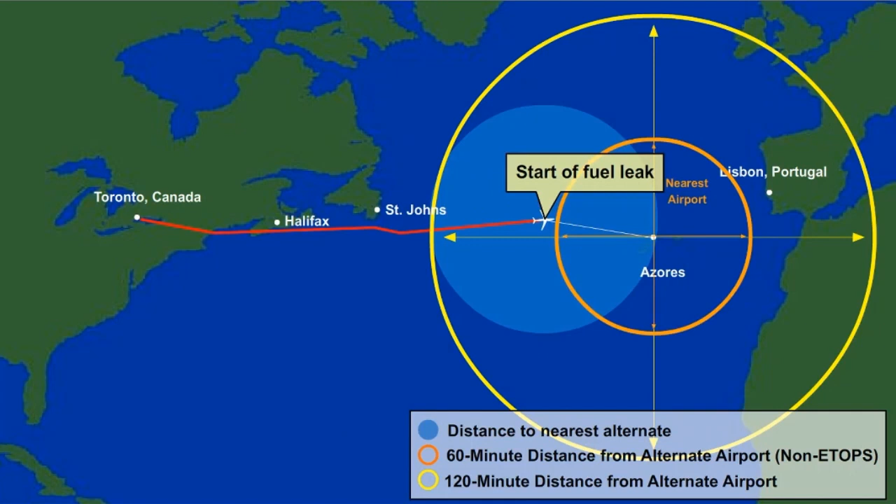This non-ETOPS portion is shown by orange circles. The first point in the flight that is more than 60 minutes from the nearest diversion airport, shown as the airplane crosses the furthest extent of the orange circle from St. John's, is called the ETOPS entry point. During the ETOPS portion of the flight, the airplane stayed within the 120-minute diversion distance shown as yellow circles. After passing another equal time point between St. John's, Newfoundland and Lajes Airport in the Azores, Lajes became the nearest alternate.

The investigators determined that the fuel leak in the right engine began at 4:38 Coordinated Universal Time, just before the airplane reached the 60-minute circle of Lajes, known as the ETOPS exit point. As the fuel leak grew larger, there came a point where the airplane no longer had enough fuel to fly to its destination of Lisbon.

Initially, there was enough fuel to fly to Lajes. However, the flight crew was distracted by unusual engine oil instrument readings. This, combined with an automatic transfer of fuel to the tank feeding the leaking engine that masked the loss of fuel out of the tank, delayed the crew's awareness of the loss of fuel. By the time the crew initiated a diversion at 5:45, the airplane had already lost too much fuel to reach Lajes Airport. The right engine flamed out 150 nautical miles from Lajes.

The left engine flamed out 65 miles from the airport. The flight crew was able to glide the airplane to a safe landing. However, the airplane was damaged during the landing rollout.

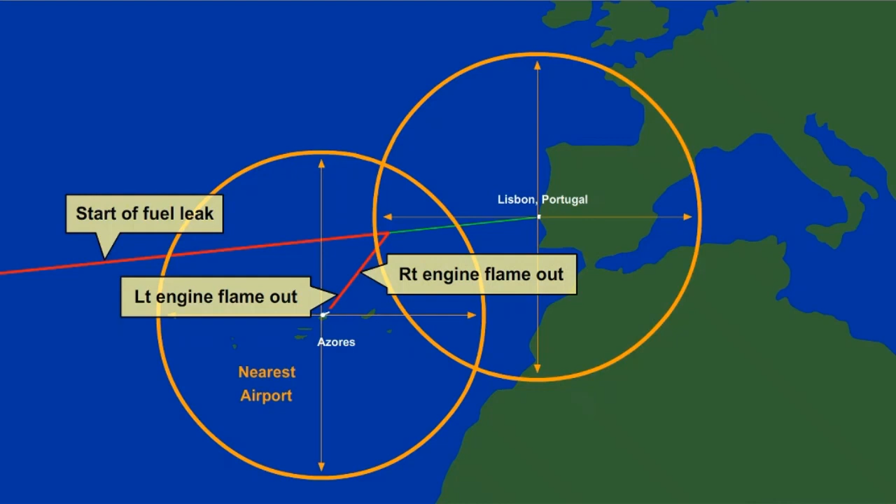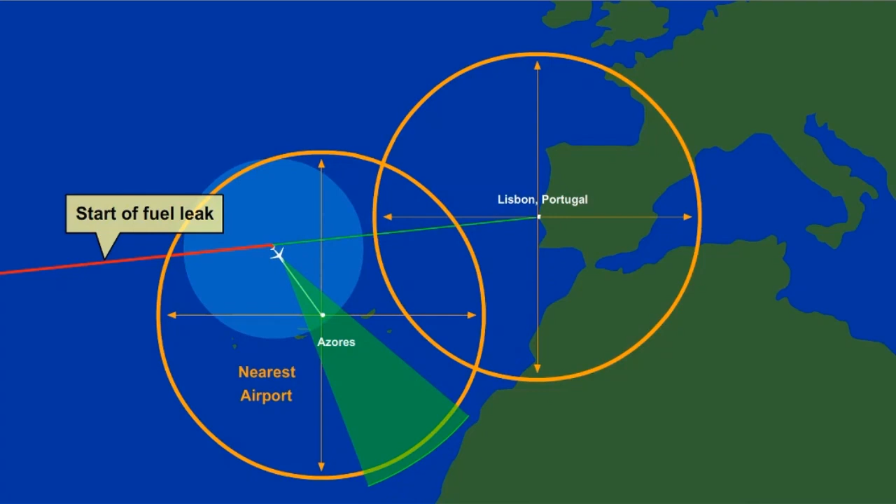Following this accident, requirements for low fuel alerting systems were added to the ETOPS regulations. Had the AirTransat A330 airplane been equipped with such a low fuel alerting system, the flight crew would have received an alert on the electronic centralized aircraft monitoring system, advising them of their low fuel condition with sufficient time to safely divert into Lajes. Checklist procedures associated with the alert message would have required the crew to shut down the right engine to stop the leak and to isolate the remaining fuel available to the operating engine.

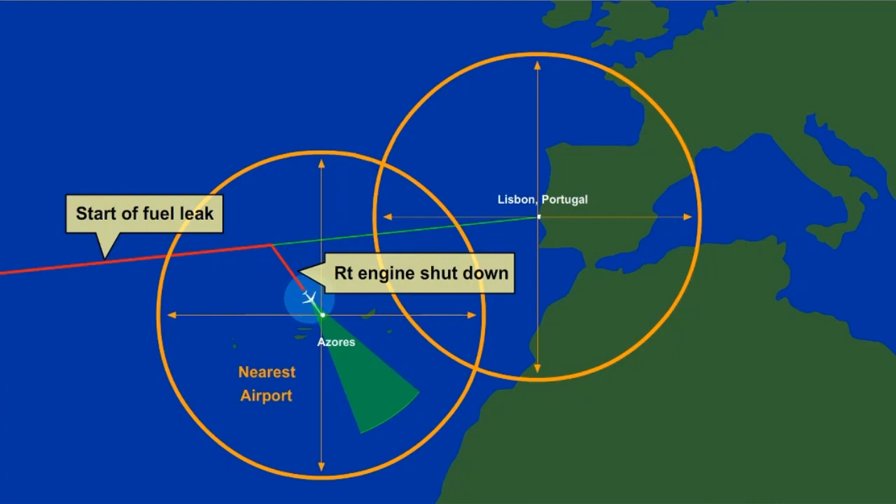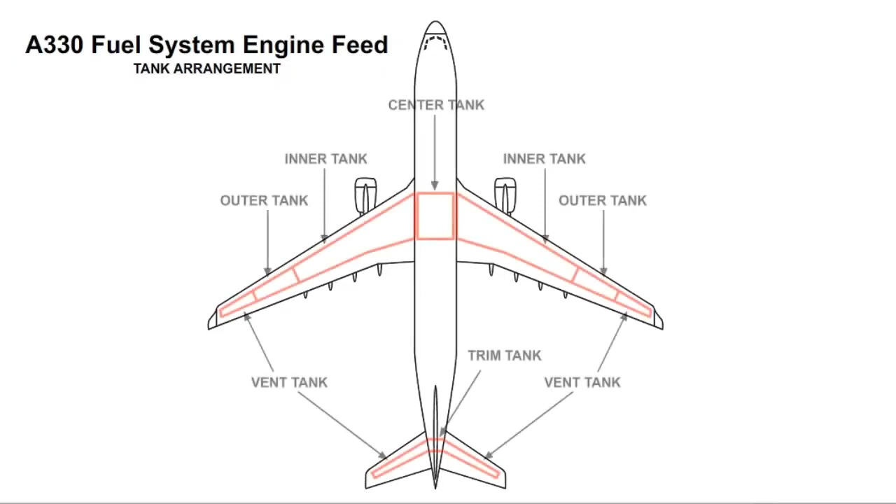This is a simplified diagram of the A330-200 fuel system. The system includes a fuel tank located in the trimmable horizontal stabilizer, controlled by a fully automatic stabilizer trim tank transfer system. The system controls the center of gravity, or CG, of the aircraft by transferring fuel to or from this trim tank to maintain a CG within 0.5% of a target value.

When fuel is transferred aft to the trim tank, the CG moves aft. Conversely, when fuel is moved forward out of the trim tank, the CG moves forward. It is through the movement of fuel back and forth in this manner that the trim tank transfer system controls the aircraft CG. The purpose of the automatic transfer system is to increase fuel efficiency by managing the airplane CG,

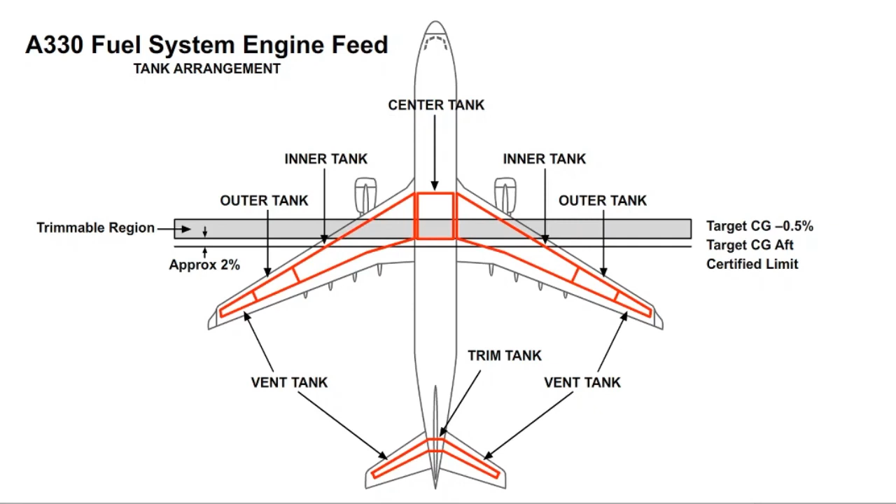Early in the flight, the system transfers fuel into the trim tank until the trim tank is full or the CG reaches the target. Normally, only one aft transfer of fuel is required per flight. As fuel is consumed from the main fuel tanks, the CG moves aft.

When the CG reaches its aft target value, which is approximately 2% forward of the aft CG limit, the system transfers fuel out of the trim tank forward to the inner main tanks until the CG is 0.5% forward of the target value. Then the cycle repeats itself with a series of fuel burn and forward fuel transfers to maintain aircraft CG within this 0.5% CG region.

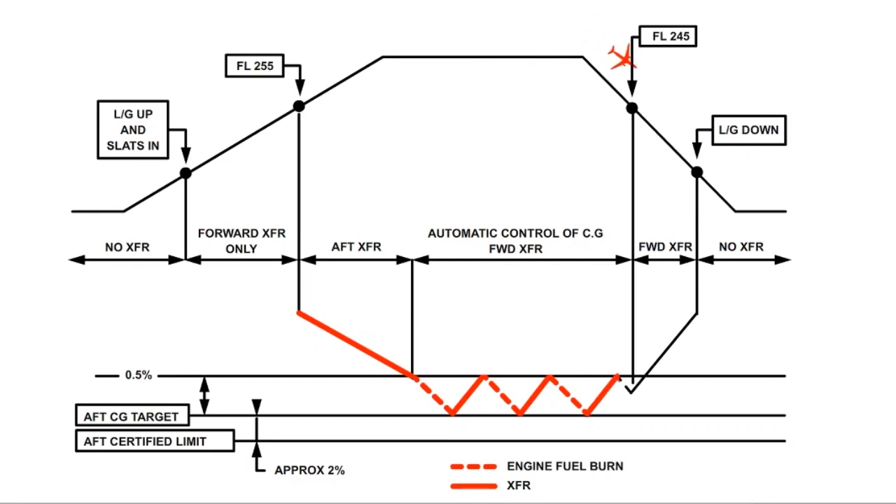A final forward fuel transfer occurs when the airplane is within 35 minutes of the destination, when the quantity in either of the two inner main fuel tanks decreases below 4,000 kilograms, or when the aircraft descends below 24,500 feet.

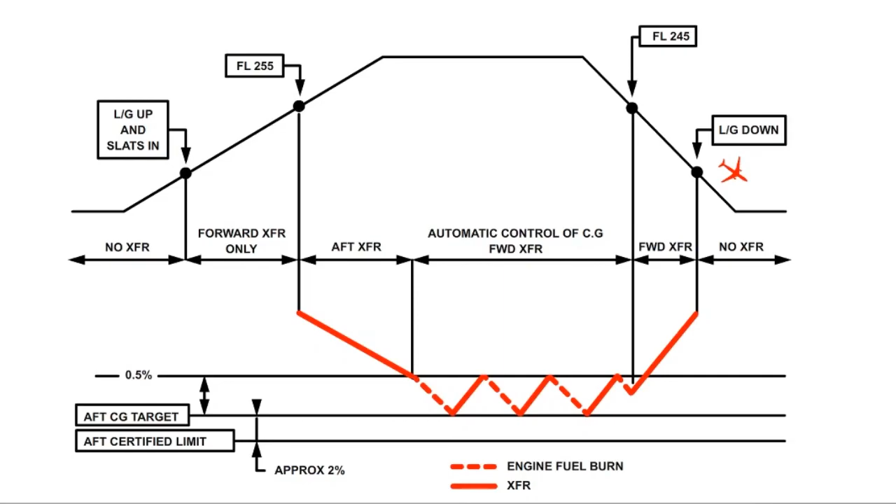Early in the flight, the left and right aft transfer valves, the trim pipe isolation valve, and the trim tank inlet valve open to allow fuel from the engine fuel feed plumbing to flow aft to fill the stabilizer trim tank. These valves close when the transfer is completed.

Once in cruise, the CG moves aft as fuel is consumed until it reaches the target value. The system then opens the left and right inner tank inlet valves, the trim pipe isolation valve, and the trim tank isolation valve to allow fuel to flow from the trim tank equally to both inner fuel tanks.

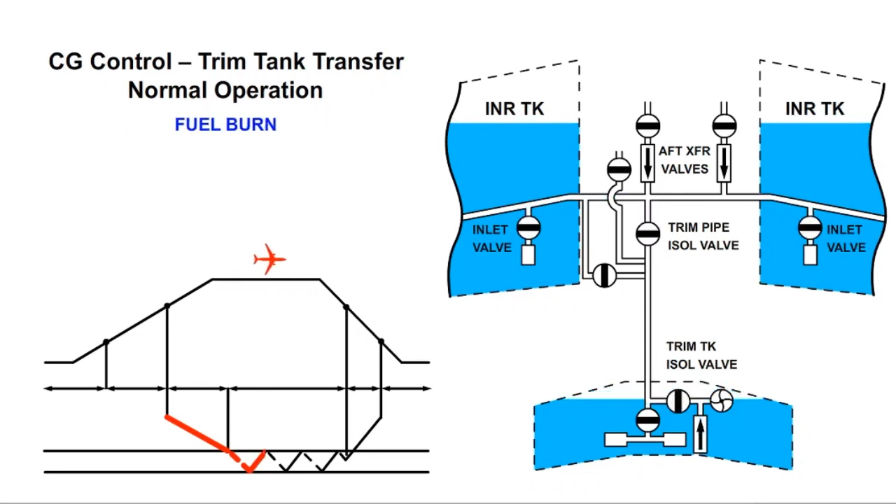These valves close when the CG moves 0.5% forward of the target value. Then the cycle repeats until the final fuel transfer as the airplane nears its destination.

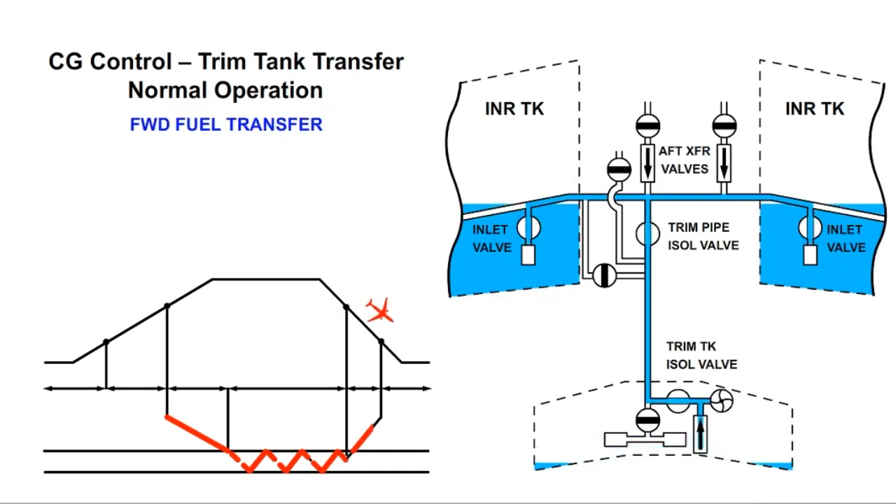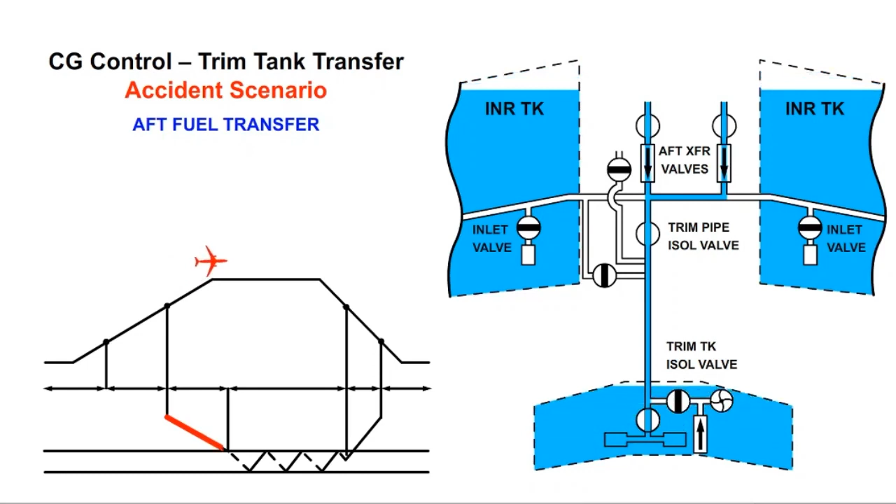During the accident flight, the trim tank transfer system functioned normally. After the fuel leak began in the right engine, the automatic forward transfer of fuel occurred significantly before it normally would have, because of the fuel loss in the right inner main fuel tank caused by the leak.

The accident investigators recorded two forward fuel transfers. The first smaller transfer of 300 kilograms lasted for 2 minutes. The second longer 19-minute fuel transfer moved the remaining 3,200 kilograms of fuel out of the stabilizer trim tank.

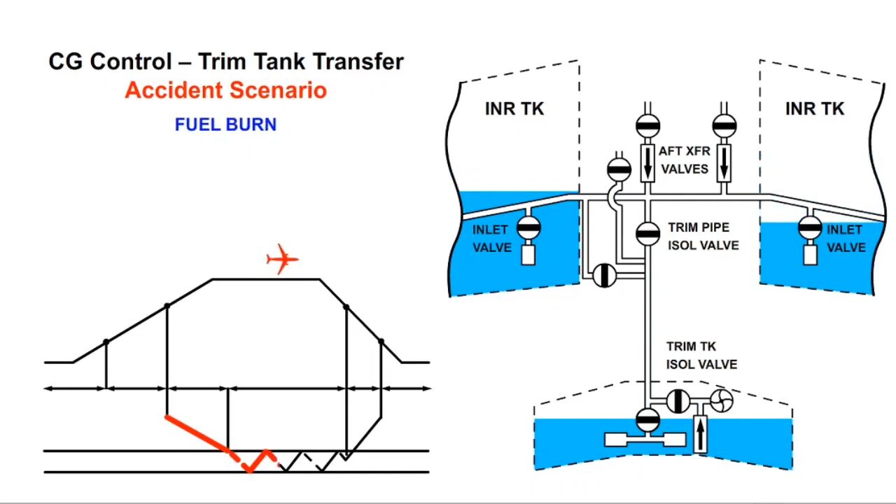In addition, the system transferred more fuel to the right main tank, which was lower due to the fuel loss, until it equaled the quantity in the left tank. This automatic fuel balancing function of the trim tank transfer system delayed the display of a fuel imbalance ECAM message, which would have alerted the flight crew to the abnormal fuel state.

The accident investigators determined that this automatic trim tank transfer and fuel balancing delayed generation of an ECAM advisory fuel imbalance message by about 25 minutes and contributed to an unnoticed loss of 3,500 kilograms of fuel.